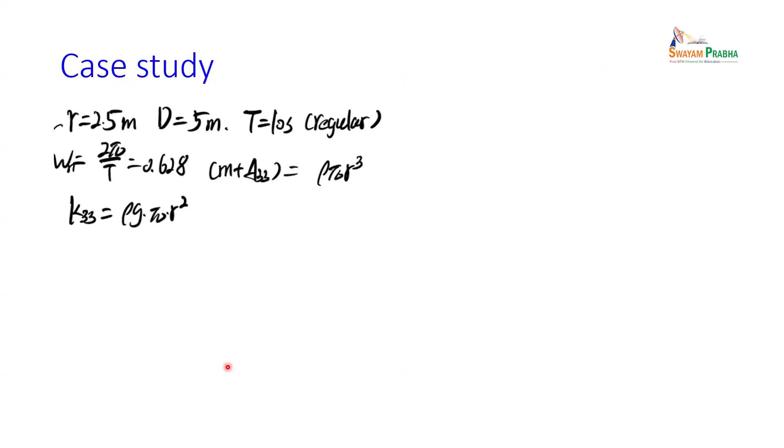Let's say this one: the buoy is 5 meters. The draft means how deep it goes into the water, right? Let's say the draft is 5 meters. We want to match a 10 second wave. This is very typical in California waters.

Suppose it's ball shaped, so you can calculate the natural frequency for a 10 second wave. You can calculate the stiffness, added mass, like that. So you will find for this one, 5 meters, the mass is 33 tons.

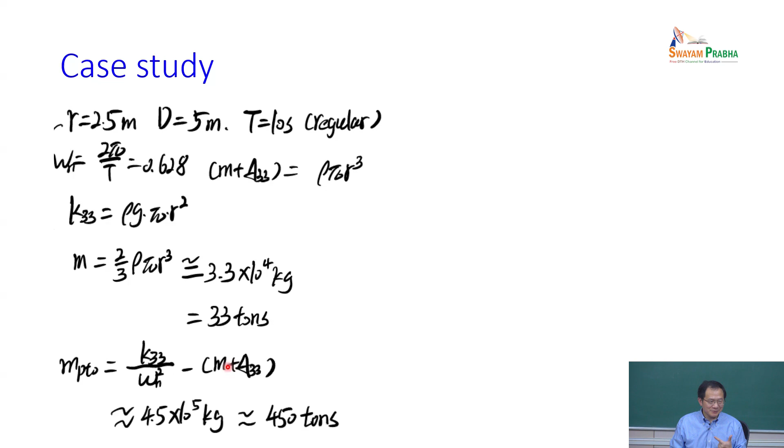Okay, to achieve the resonance, ideal resonance, you need 450 tons of mass. You need a huge flywheel or huge gear ratio.

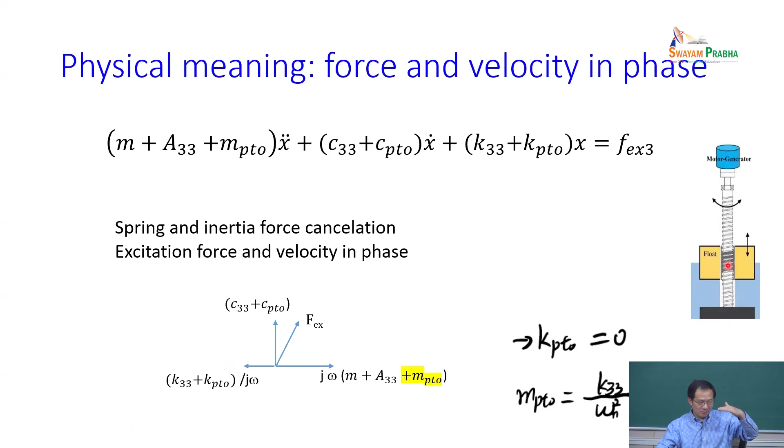The flywheel and gear ratio translate into linear mass, so rotational inertia, let's take it that way. If you have a ball screw with a very small lead angle, small rotation speed gives small linear speed, but you change to high speed rotation, right? Then you can achieve large rotation inertia, large mass. Or not only motor, use a gear motor, you can put a gear ratio there. You speed up the gear by 10 times, rotation inertia increases 100 times. So depending on the case, you may achieve such large mass effect using a small physical flywheel.

Okay, so there's a risk, right? You may have a larger gear ratio, then all kinds of friction come up. Another thing I told you, in addition to rotation inertia, maybe achievable, it's not totally unrealistic. I will tell you what's not realistic.

The vibration amplitude. So you already get the best stiffness cancelled. I told you at the beginning, when the system achieves optimal, the CPTO damping will be the same as radiation damping. For this special case study, you can have damping like that. You plug all the parameters in, and you will find your vibration amplitude is 80 meters. Your buoy is just 5 meters. A 5 meter buoy, you jump 80 meters up, 80 meters down.

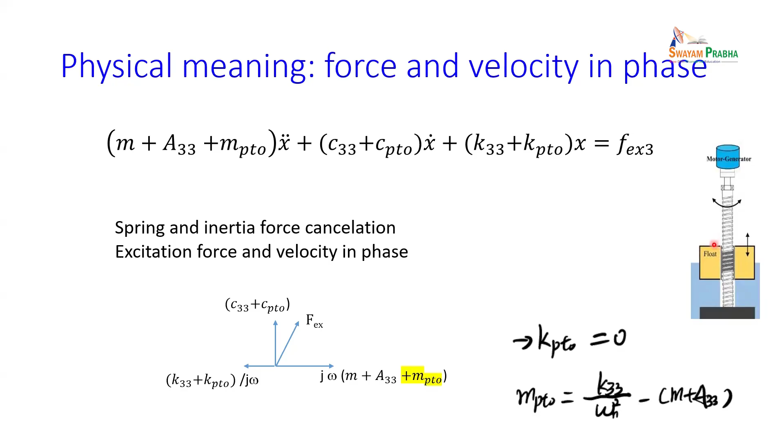With limited stroke, you add the damping. As we mentioned, you still cancel the stiffness effect. The only thing now is the damping - you don't choose the PTO damping equal to, you choose the PTO damping larger than the radiation damping. First you cancel the stiffness and mass, and for maximum power output, you choose PTO damping to be the radiation damping.

Now I choose larger damping. You need to check if you have a given limit of stroke. If this is given, how large can the PTO damping be? You choose larger damping so that you limit the stroke. It's a vibration system - now your damping is made larger, then the stroke is limited. So for the given stroke, you have maximum power output.

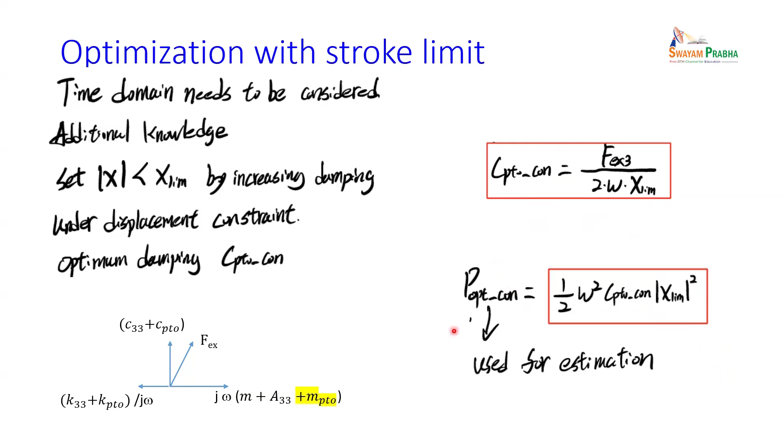Now we talk about everything in this frequency domain. You cancel that - this cancellation is for a given frequency. Is that true? It's for a given frequency, since at the given frequency you can have a given radiation damping. I mentioned radiation damping is very, very sensitive to the frequency, and also for the given frequency you can calculate added mass.

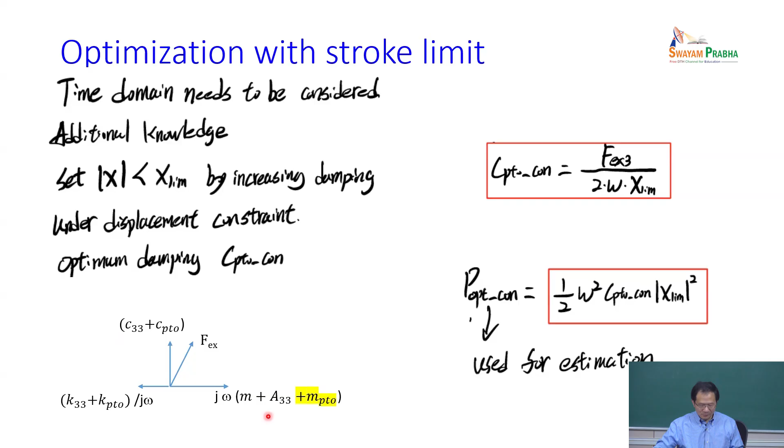That is for regular wave, harmonic single frequency wave. Most of the case you have a certain spectrum, whether well developed or not well developed - that is irregular wave. So for irregular wave, what will you do? You know how to design your PTO for the regular wave. You say, most of the case my wave is at this frequency, I can design for this frequency.

For example, I said in the US East Coast it's 8 seconds roughly, but the spectrum is not exactly 8 seconds - it's a range, maybe 5 to 10 seconds. I said 8 seconds is most popular, so I designed for 8 seconds. It's okay, nothing wrong with that. As an engineer, you do a regular wave design, you quickly choose all your parameters based on this frequency - that's fine. That is the first order design.

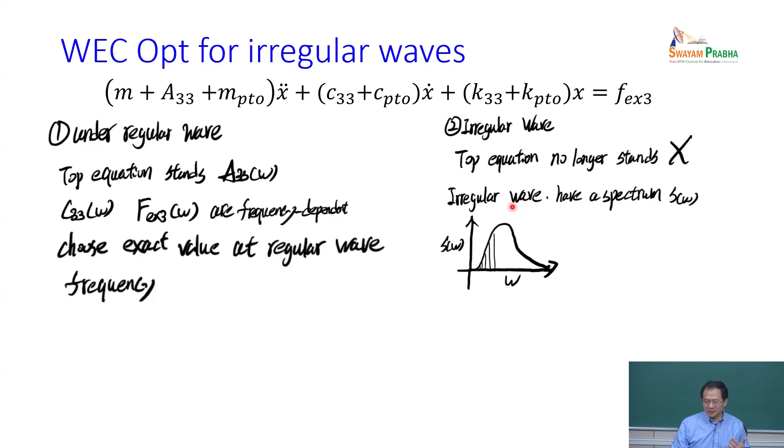If you want to evaluate the performance to say that is good or not, you can do that - you understand single frequency, now you put all kinds of single frequency together. Here one frequency, another frequency, all the frequencies together - it's a superposition. Here is amplitude, and here is one frequency, this amplitude, and you can use that way to calculate the spectrum, delta omega times 2 square root. We know that already.

So the only thing is we may use a different symbol here, that's fine. And when I put the lecture notes together, I didn't get a chance to work on the slides myself. This slide, the scientist in my group, Xiaofan Li, last year when I was traveling, he gave the lecture, so this is his handwriting.

Anyway, that is for the irregular wave case - you can choose the dominant frequency, you do first order design, and after that you can take all the frequencies together. You can do numeric optimization to fine tune your parameters. In ocean wave engineering, it's totally fine to have some very rough design and quick engineering iteration, then use a high fidelity model for the calculation too.

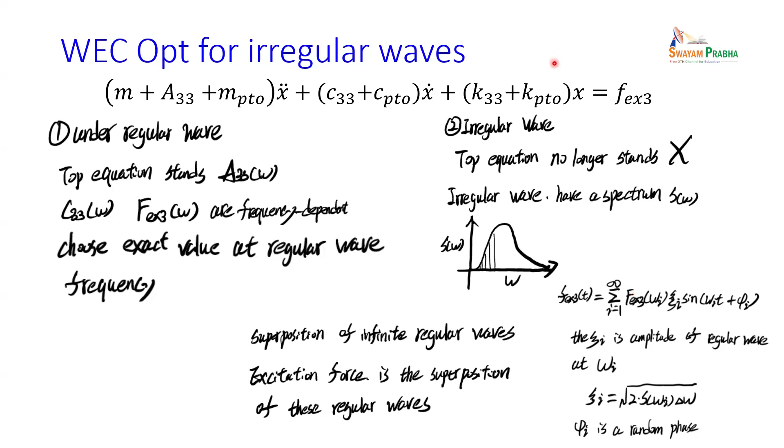Okay, so this is for the regular wave case. And in the textbook, for example Professor Falnes's textbook, he assumes the PTO stiffness is 0, PTO inertia is 0. This is why in most reference books you find this equation, they just have PTO stiffness, PTO damping. Actually, you have PTO mass effect or rotation inertia effect.

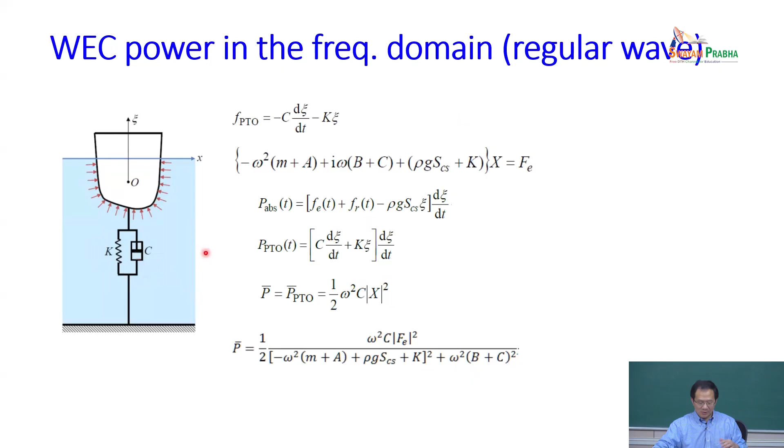So no matter what, you get such kind of result that you match the natural frequency. Basically, you cancel the mass effect and stiffness effect, right? You match the damping, and your electric damping, which is the PTO damping, matches radiation damping. In such a case, you get maximum power output.

However, take a look at the figure here. That is frequency, this is how much the excitation force is. When we use this equation and do the derivative, whatever, you assume that when the frequency changes, Fe, the excitation force, is constant. But now you look at that, well, if I tune to this frequency, the excitation force is not constant, right? So keep in mind such kind of design assumes the excitation force is constant, this is an approximation.

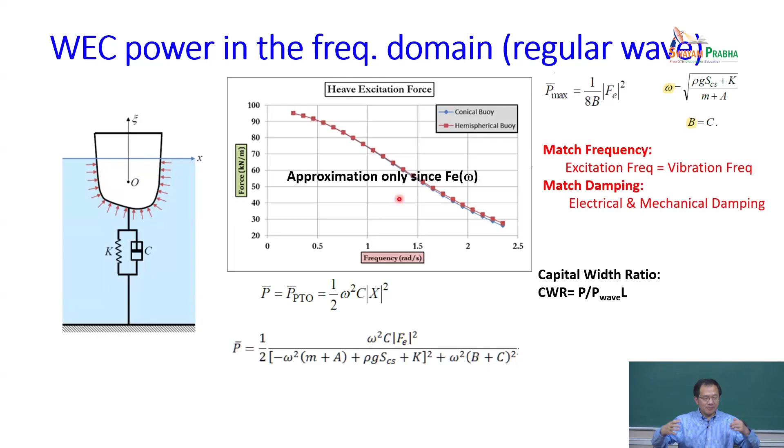Okay, so let us define another thing called capture width ratio. Capture width ratio, you have a buoy here, how much power goes to the buoy, right? We say the wave energy is measured by kilowatts per meter. The buoy here, this size will come to here, how much wave, that is kilowatts per meter times this dimension in meters.

This is the input power to the buoy. Then, as I already told you how to calculate the output power, the output power divided by the input power, we define that as the capture width ratio. Is this clear? This is the input power, output power relationship.

Okay, sometimes, a concept used popularly, but that is not correct, is hydrodynamic efficiency. Sometimes I say, okay, this certain hydrodynamic coefficient or hydrodynamic efficiency. I put the buoy here, I get 50% energy out, I say this is hydrodynamic efficiency 50%.

Sometimes we use that hydrodynamic efficiency as a word for capture width ratio. Which one is better? Which one is the better word, hydrodynamic efficiency or capture width ratio? Okay, let me tell you. Scientifically, capture width ratio is the good word. Hydrodynamic efficiency is a misleading word.

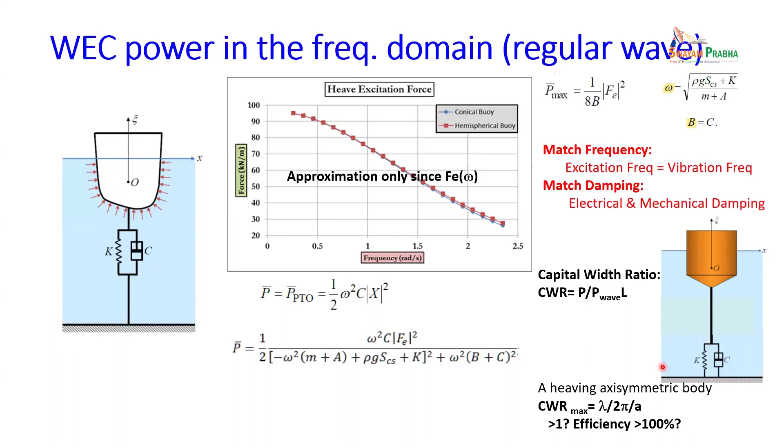So now as you understand that, you need to reduce radiation damping. People try different ways to reduce radiation damping. Radiation damping contributes to fluid separation. So this design reduces the separation, so that the backside will not become a wave maker. Similarly here, the backside will not be a wave maker.

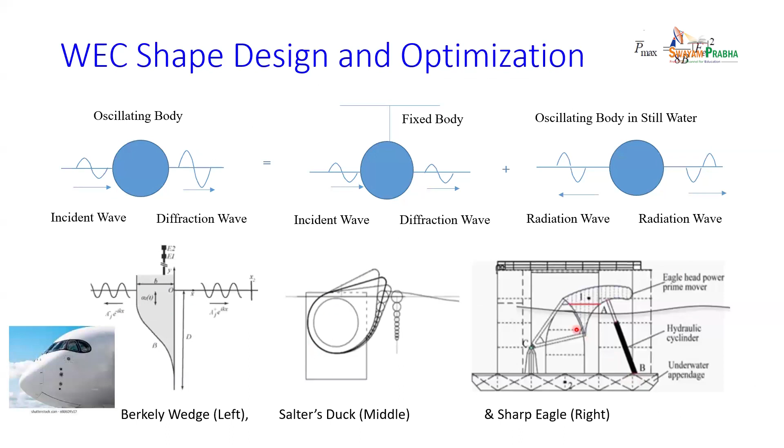So we took a different way to enhance the power output using added mass, using flywheel rotation. Actually, we also can design your system. When you design the system, keep in mind you can also play around with the hydrostatic stiffness.

So here, this one, your stiffness and the PTO stiffness - you can have hydrostatic stiffness. This expression follows Professor Falnes's work. We didn't write the PTO's inertia here, but actually you can write the PTO's rotational inertia here. You can place this around.

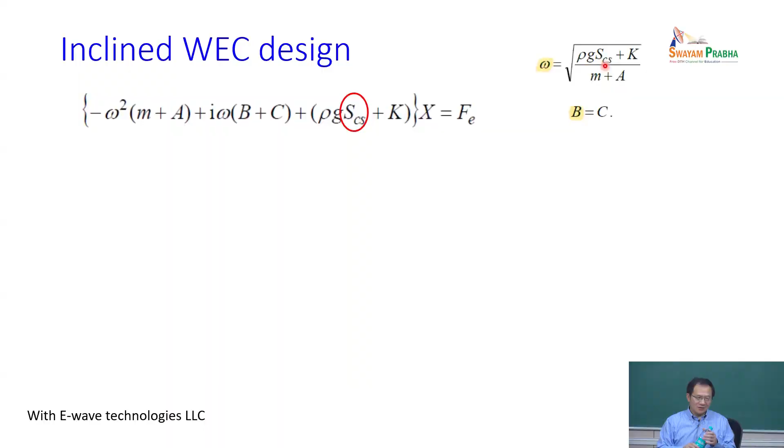For example, as they say, most times the stiffness is too high. If stiffness is too high, I can make the damping - make the hydrostatic surface area, hydrostatic stiffness area, small. Instead of submerging water here, I submerge water here. Which one has smaller stiffness? This now will have smaller stiffness. You can design for this.

So I'll give you one example. This work is in collaboration with E-Wave Technology, a startup company. So we would not design a wave energy converter - we use a power fish farm. So it takes this shape. It's inclined - what does this inclined shape try to do?

The device is usually small. You want to reduce the stiffness, and the stiffness is the cross section of the water. In this one, the cross section of the water volume - you put this inclined in the water surface, or you put everything in the water. Just put this in the water.

Then you will have huge stiffness. Now I can put it this way, and the stiffness becomes smaller - make sense? So, or you can do it another way. This shows one design. You have this mass - let's say this mass here, and you cut this mass. The hydrostatic line surface here becomes smaller. This point, this part, is a hinge. Now I just cut this out. This waterline here - then stiffness becomes smaller.

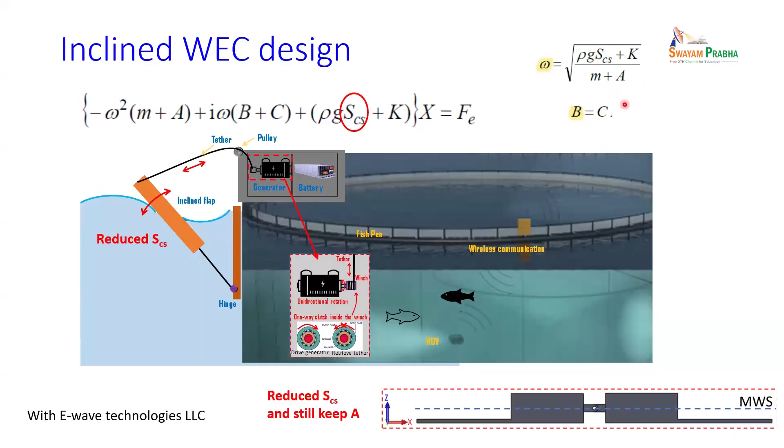And once you guys ask this question - okay Professor, why do you only consider radiation damping? There are all kinds of other damping. In this fluid system, there's always viscous damping, there's drag damping - drag damping is second order damping. In this system there are all kinds of damping. But for the buoy on the surface of water, mostly the radiation damping dominates - the viscous damping is small. So for the buoy on the surface, the radiation damping is dominant. This is why we only consider radiation damping.

So if this is under the water, in such a case the radiation damping can be small, or the viscous damping you need to consider - yes, this is true too. And if you go for a larger diameter, then the power also increases, yes. I think the more important thing is not viscous damping, it's drag damping. Drag damping is proportional to the area - you go large, then you have large drag damping.

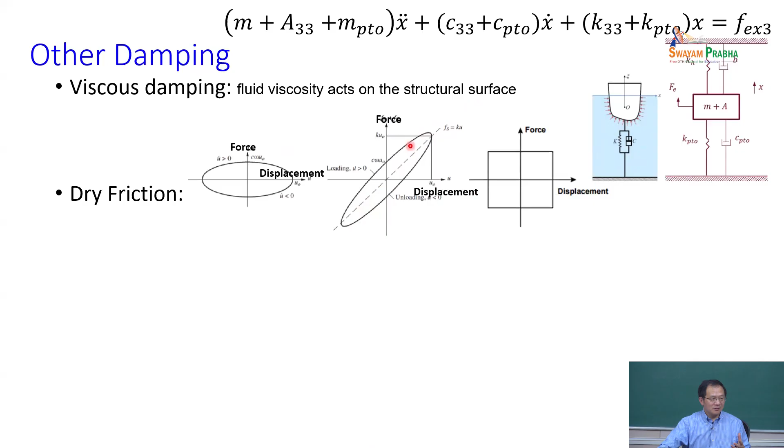Another type of damping is dry friction. You have ball screw, rack and pinion, or something touching that gives you dry friction damping. With dry friction damping, the force displacement looks like this: you push one direction and have constant force, then the other direction has another constant negative force. At this end, when you're about to change direction, the force can be arbitrary between the negative maximum and the positive maximum. When you measure your system and find this type of shape, you know you have dry friction in the system.

If you find this loop is not in the horizontal direction, you know you have stiffness in the system. Wait a second, you can also have mass in the system. Stiffness equals force is K times X. Mass generated force is negative M times omega squared. So then with mass, this system tilts to that direction. If the spring is cancelled, you return to this loop, this shape.

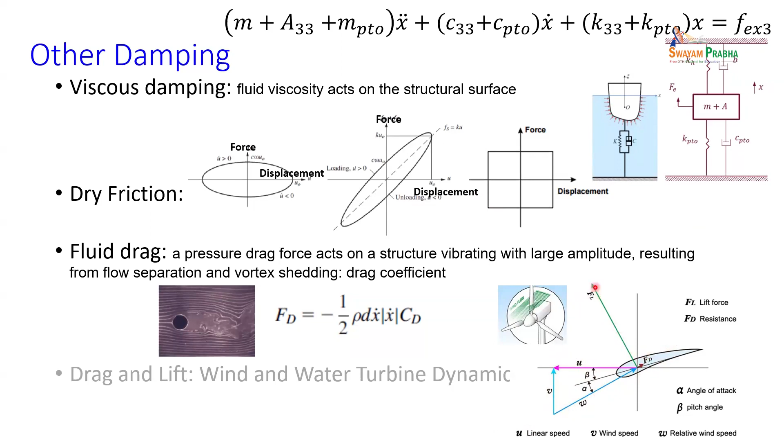We are going to go over this figure I gave you, and you guys can understand it. This turbine has a rotation speed, and there's wind speed in this direction too. The total wind in this direction is the wind combined direction. So along this direction is drag, and perpendicular to this direction is lift.

Okay, so after that we talk about tank tests. Let us continue. I'm going to talk about tank tests. When you do the model in tank tests, in the ocean you have huge waves, long wave lengths, but in the tank you cannot build such a large device. So your device is small. How do you make your device representative? That's what we talk about with the Froude number.

The Froude number gives a scaling law. Basically, for example, if you build a 1 to 25 scale device, and your full scale is 12.5 meters, you want to build 0.5 meters, that's 25 scale. How do you scale the wave period? Wave period is not scaled by 25, it's scaled by the square root of 25, so 5 times. If you have a wave period of 10 in the ocean, in the tank test you put a 2 second wave. So that's the scaling of frequency. Power density is scaled by, let us say, 25 to the power 2.5. It scales very, very quickly, up or down.

Actually, this scaling is based on the Froude number. What is the Froude number? The Froude number itself is inertial force divided by gravitational force. That has been used for tank tests, including boat tests, ship tests, and also offshore wind structures - all types of things use the Froude number. Like this one we build here, this is 1 to 10 scale. If we build a 1 to 10 scale, you need to scale the wave, and wave height can be scaled linearly, but wave period and wave power density are scaled at different scaling laws.

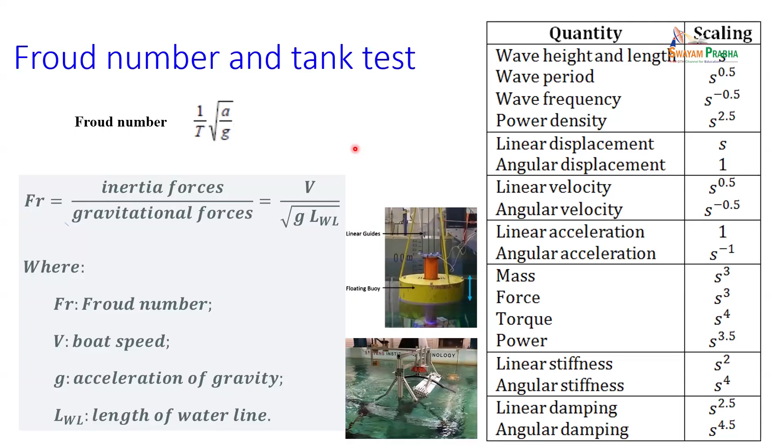Okay, so this is how you do the tank test, and this is similarity. That means you follow this law, you can predict the full scale system.

For example, like this tank, right? If this one is 4.7 meters, right, if you scale 1 to 10, this corresponds to the ocean side, 47 meters, like that.

Let us say this one. Take a look at the power. The power scaled by S to the power 3.5. Let us say that way.

Let's give one example. If your full scale system is 22.5 meters, right, roughly quarter wavelength, and this device you may design for 300 kilowatts. Now you scale down 1 to 20, 1 to 30, your device is 0.75 meters. 0.75 meters is pretty large device in the tank.

So, if your ocean wave is 2 meters, after you scale 1 to 30, it will become 67 millimeters, right, and it's this much. So now your wave, let us say, is a 9-second wave; according to wave frequency scaling down, it becomes a 1.6 second wave. Now, using this power 3.5 scaling law, the 300 kilowatt device becomes 2 watts.

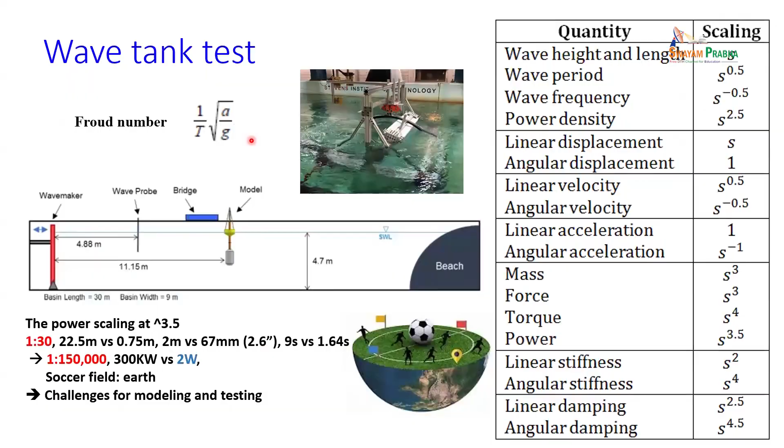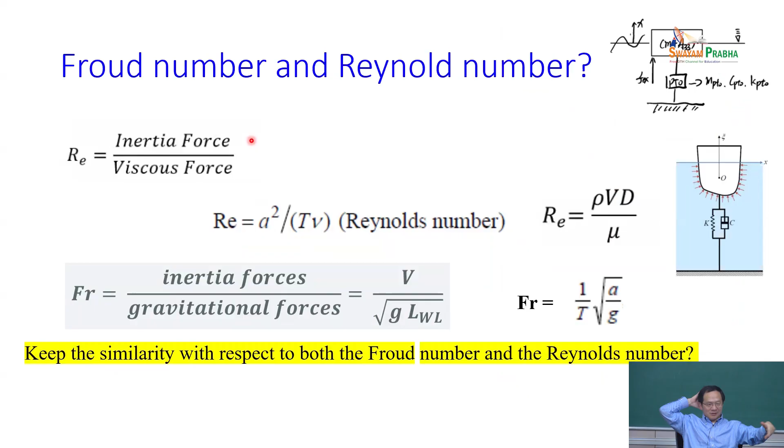I just told you we use Froude number. Why didn't we use Reynolds number? This wave theory we discussed so far, we didn't consider viscosity, right? Radiation damping, added mass, all these concepts come from potential flow. So for this reason, which one are you going to use?

Reynolds number has a viscosity force there, right? Froude number is just inertial force, right? Froude number is good enough so far for wave energy study, right, unless you have to consider viscosity. And as I explained to you, for the buoy type of thing on the surface, radiation damping dominates much larger than viscous damping.

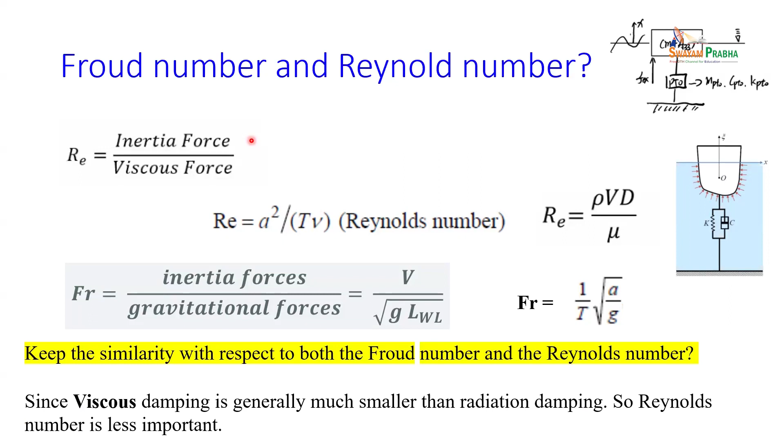Therefore, you don't need to consider the Reynolds number. Okay, and keep in mind how to scale things up, scale things down. Okay.